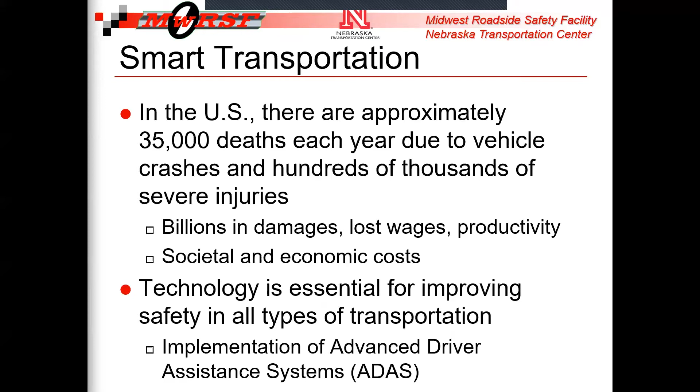Connected and autonomous vehicles, or CAVs, pose an exciting opportunity to reduce the risk of on-road and run-off-road crashes using innovations in technology, mapping, simulation, and hardware-in-the-loop evaluation. Therefore, I am pleased to introduce our speakers to address these safety-critical topics. First, Mr. Jason Marks will discuss the role of instrumentation, sensors, and processing for smart vehicles and transportation. He will describe machine learning techniques for infinite state space road mapping, simulation, and applications to hardware-in-the-loop technologies. Next, Mr. John Barad will discuss mobile and fixed LiDAR technologies and implementation, as well as their role in identifying road users, mapping movements, and developing informational systems for vehicle-to-everything, or V2X, technology.

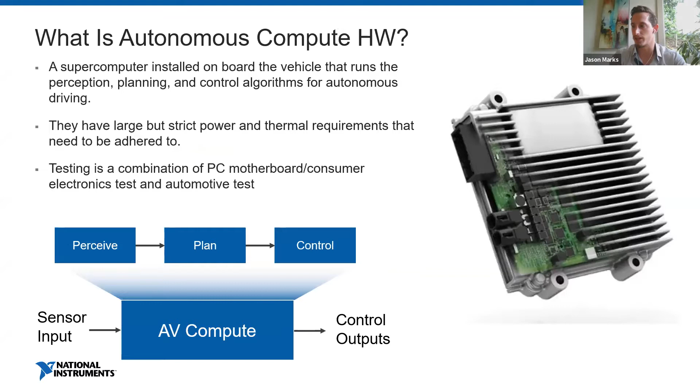Inside of that autonomous compute hardware is actually just your standard robotics paradigm, which really goes through the process of perceiving the world, planning on what to do, and then controlling action of the vehicle. So into the autonomous system is a number of sensors we just described, and output is the control of the vehicle, namely brakes, throttle, and steering.

And if we take a look and open up that box and look at the software stack that is inside of that, you'll see some permutation of this kind of paradigm. So the sensors usually for perception are camera, radar, Lidar, and then a number of other sensors also used for localization of the vehicle in the world.

Inside of the perception stack, or software, is a number of machine learning algorithms that are actually non-heuristic. They use deep learning or other types of AI to determine where the vehicle is, to determine the scene it's looking at, lane markings, object detection, and estimation of where that object's going.

The planning stack then constitutes mostly heuristic algorithms, but also potentially some machine learning algorithms. Particularly when we talk about behavior selection, there is a large number of choices that can be made in any given situation, and then there's an optimization to be made. That can be done either heuristically or non-heuristically.

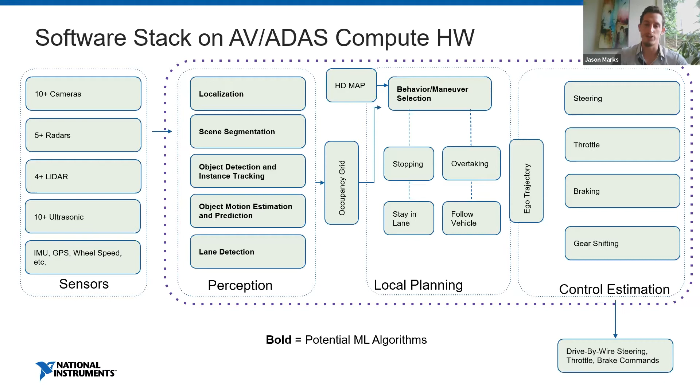As we get into the control system, that's where we see FPGAs deployed for deterministic control. Namely, we pick a trajectory from the planning stage and we then drive it through steering, throttle, braking, or gear shifting. And those usually are actually constituted drive-by-wire commands over the CAN bus.

I did want to talk briefly around the topic of machine learning in perception systems, because this is where the majority of the machine learning occurs. So one thing to note is that there is no set methodology for determining how you perceive the world, how you classify the world. There's tons of different strategies, and everybody's deploying something slightly different or potentially majorly different.

One such example, and this picture is taken from Berkeley Deep Drive, is that if you have your sensor input of Lidar and camera, if you wanted to have an accurate view of the world, you could fuse those together in the beginning. You could overlay your point cloud on top of a camera image and then send that through a convolution and a bunch of deep learning algorithms and determine what that classification could be. That's one way of doing that. We call that early fusion.

However, you could just as well send both the camera data and the Lidar data through two separate convolutions and two separate deep neural networks to classify the world. And then you could compare the outputs. We call that late fusion. Both are equally viable, and they both net you potentially different results. So you have a lot of options for perception systems, which makes this problem even more challenging because there's no set agreement upon the algorithms you would be using for this.

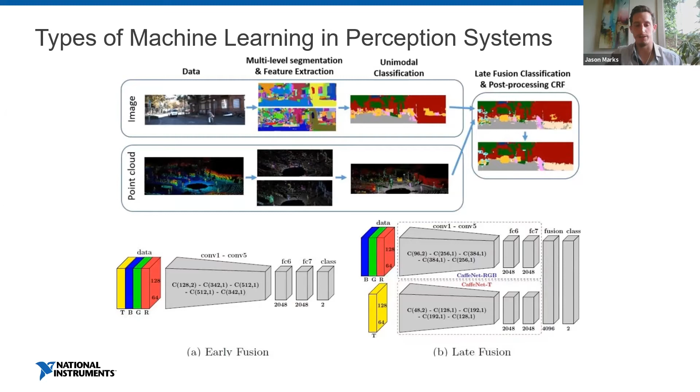So with that said, I hope I kind of made you understand that machine learning is complicated. There's a lot of different permutations of it, but there's lots of ways in which we can actually approach validation of those machine learning systems. So there's two different approaches when we talk about validating machine learning. We talk about white box validation and we talk about black box validation.

White box validation really means, in my deep neural net, are my nodes activating? And that's because you have the vision to look into the box and say, are my nodes activating? Is that an activation occurring? That's one way to validate that.

Black box validation really means I am looking at a black box machine learning algorithm and I only have access to inputs and outputs. How do I validate a system that I only have access to inputs and outputs if I can't look at what's going on inside of here? Most of what we're going to be describing today is actually going to be in that black box category.

So when we talk about testing machine learning, one thing that I'm not sure will surprise you or not, but 99.9% of the validation that occurs for machine learning algorithms in autonomous systems occurs in simulation. And the reason is because of that quote unquote infinite state space that occurs in the autonomous vehicle space. You could have any permutation of road conditions, of weather conditions, of vehicles, of actors moving in various ways. So even if you encounter a scenario like that in real life, you can imagine that there's an infinite number of permutations of that scenario you could have encountered in real life, which is why we simulate it. So we do 99.9% of the testing in simulation.

And then once we're confident in simulation, what we do is we move a subset of that simulation to actually deploying those simulations in a hardware environment. So we deploy the algorithms that we're testing in simulation to a piece of hardware, and we stream that information to that hardware. And we call that hardware-in-the-loop test.

And then we do a combination of on-road testing as well as data recording of those on-road vehicles. I will say that the on-road testing can go either direction. It can happen at the end when you want to validate that everything is safe, that you've already created a great system, or it can happen at the beginning when you just want to aggregate a bunch of data so you can then play that back into a testing scenario. So data recording happens in both stages.

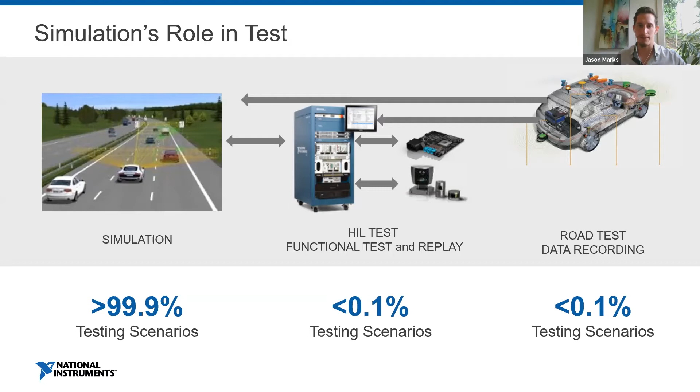So because 99.9% of the testing happens in simulation, let's talk about what are some of the really big challenges of simulation. So what makes simulation hard? Why are we not just all doing the same simulations? Are we all not having the same simulator that we're using? Well, the real answer is I like to kind of group them into three different categories. There may be more, there may be less. I like to talk about it in three main categories.

One is that when you do simulation, you're actually trying to replicate what that particular sensor on the real vehicle would be seeing. And you want to do that in a realistic way that can actually train and test the algorithms that are being deployed. So in order to do that, you have to have a high enough fidelity of the sensor you are modeling that actually is representative of real life. And that is very hard to do.

Just like anything else in the academic world where you're trying to model a physical phenomenon with math and physics, you can get to a pretty good confidence that you're there. And then there's always some different permutations that occur based on environmental conditions, things like that, that diverge from the perfect physics-based implementation. That same thing occurs for sensor models. You need not only a physics-based implementation of that sensor model that represents how that sensor looks, but you need to validate it against an actual sensor so you know that you're getting a correlated sensor capability.

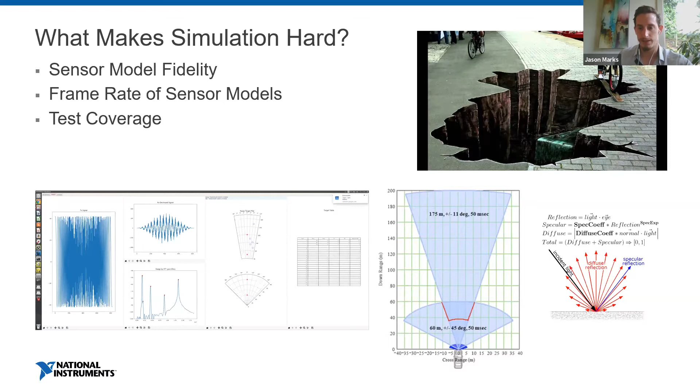So talking real quick about the architecture of simulation. All simulators will look something like this. There may be some variations of it, but it will all look something like this. There will be a simulator that has a world environment in it.

A lot of people are leveraging Unreal Engine 4 for that. Some people do not use gaming engines for that. But that is where the ego vehicle, which is the vehicle under test, is driving in a simulated real world. And there are actors, so other vehicles, pedestrians, cyclists in the world that are navigating around that. Those all have to have some level of intelligence so that they interact with the vehicle appropriately.

From that simulation world, you would attach sensors, those sensor models, to that ego vehicle, and they would be looking out at the world in the appropriate location for that world. And they would be streaming that sensor information that's supposed to be representative of that real sensor to the system under test. So if you're testing just the perception systems, what you would be doing is you'd be streaming a high fidelity version of those sensors to that perception system.

That perception system would do its classification of the world, and it would output to either the planning system or back to your test system: here's what I think I'm seeing in the world.

If you wanted to validate just the perception system, what you would have to do is then compare that output from the perception stack to the semantic information. And because you're using a digital world, a simulated world, you have access to the ground truth associated with that world, and that's how you can validate the perception outputs.

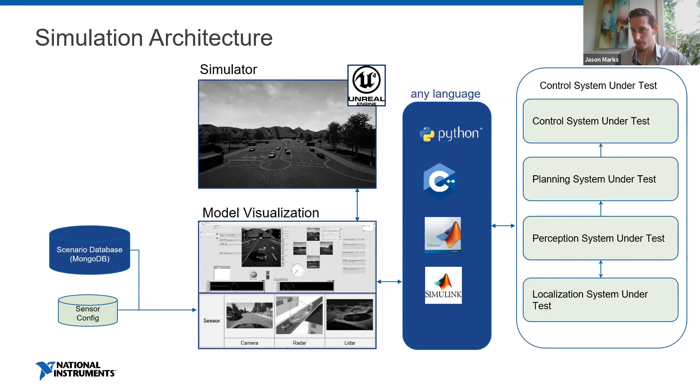So talking specifically about the challenge of sensor model fidelity. Not only do you need a physics-based implementation of radar, LiDAR, camera, ultrasonic, and so on down the line, but you also need the equivalent ground truth of that if you're going to validate the perception system. So if you're implementing radar, you need the correct representation of that millimeter wave signal, but you also need the appropriate object list per point, so you know that you're actually getting that correct.

Same thing with LiDAR. With LiDAR, you're generating a series of points in space, and you need the physics-based implementation of those points in space, which can be fairly challenging to do, and I think John will talk about that a little bit. But light and millimeter wave for radar have all sorts of characteristics that are pertinent to the material properties that you're reflecting off of and things like that, but you need an implementation of that, and then you need the equivalent semantic information.

So for LiDAR in general, we actually use per point semantic information. We categorize each point that the LiDAR is shooting out and what it constitutes as its real life answer: that's a bush, that's a tree, that's the road, that's the lane paint, that is a car. We classify that.

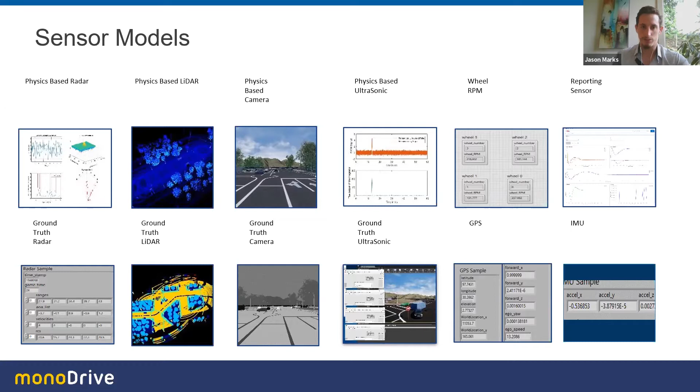So you may be asking, why can't I just use an idealized version of those sensors? Why do I have to have a physics-based implementation of those sensors? That seems computationally expensive. Well, the example I like to use is that if we look at the previous Tesla crash, there's actually, we've had two more since then.

We've had the one that just occurred this week, and then the one that happened in Taiwan a couple weeks ago. If we look at the one that occurred on Highway 101 where they ran into a fire truck—again, I don't work for Tesla, this is just speculation as to what occurred, please don't quote me on that—but what we believe is that part of what happened was the radar that Tesla was using was shooting out at the fire truck, among other things.

There were things like cones in the road that were very small compared to the fire truck. The fire truck was reflecting so much electromagnetic energy because it's so large and metal that it actually washed out the signal to noise ratio, hiding anything that would tell the vehicle it needed to change lanes and avoid the truck.

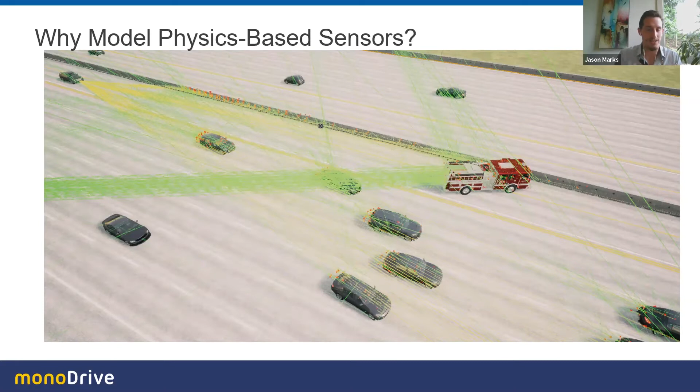So hopefully you now believe we need a real life implementation, a physics-based implementation that's validated for those sensor models. Well, how do we actually go about taking it to the next level, making sure that sensor is representative of a real sensor?

There are a lot of different methodologies, and I'll cover a few here. Some people, beyond just implementing the physics of those sensors, actually use real data from a particular sensor and train it using machine learning to represent that model in its digital environment.

Many people go out with expensive equipment and measure various materials to categorize their reflectivity at various wavelengths or electromagnetic frequencies. Some people get sensor models from the vendor directly, some buy a bunch of sensors and reverse engineer them, and some take chambered measurements of various sensors over the air to ensure they're getting an accurate representation.

So there are all sorts of methodologies, and they all have validity to them. I think some combination of all of them will ultimately prove both the most accurate and the lowest computationally expensive way to do this in real time.

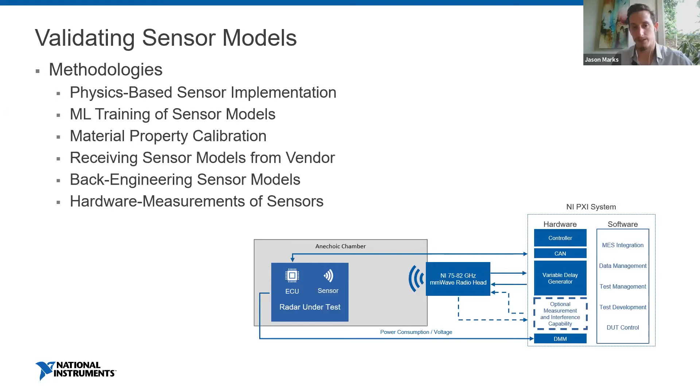Once you've got the sensor models adequately modeled, and your simulator set up so it can run in real time and test the particular pieces of your control system you want to test, now it's your job to address the infinite state space. You can do that a number of ways, and one way almost everybody implements is to parameterize their simulations.

The other piece of this I haven't talked about is what happens when you want to simulate something you encountered in real life. You recorded a real life example and want to play it back, then vary the parameters of that thing you encountered.

One such way to do that is to create a digital twin. There are a couple of companies, one of which we partner with, that are very good at taking real life recorded data and converting it into a digital twin.

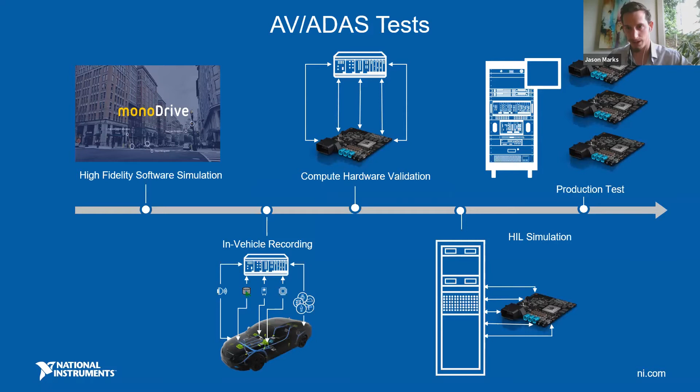You do the software in the loop, the simulation side of things, you validate the hardware, you feel good about the hardware that you've created, then you deploy that software that you've created to that hardware, and you do that hardware in the loop simulation using that same kind of description for software in the loop simulation that we've described earlier, and then you eventually deploy it to a production test environment and ship it into the vehicle.

So when we talk about hardware in the loop, we can talk about a number of things. You have all sorts of options as to where you draw the line for the hardware. You could theoretically emulate targets over the air for images by putting a big screen in front of cameras, or radar by putting an electromagnetic target generator in front of a radar, or LiDAR, which has a bunch of ways people believe you can do that as well.

You could go what we call behind the sensor, where you're injecting still into the sensor, but digitally. But what's most common in a hardware in the loop environment for testing the ECU, the electronic control unit that's deployed the perception systems, is to inject into the network bus directly.

So network buses for sensors vary. For example, for camera, we use something called a SerDes interface, typically right now from Maxim or from TI, so it's GMSL or FPD-Link. For LiDAR, we see a lot of different Ethernet technologies being used. Right now, I think the push in the industry is to move to automotive Ethernet—we call that 100 or 1000 base T1, the two-wire Ethernet protocol. And then for radar, we see a lot of people using CAN or CAN-FD.

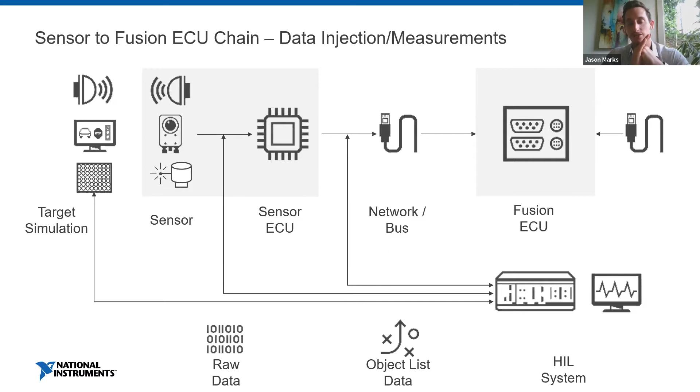But that is the network interface you have to inject those simulated sensors into in order to test the ECU. So what that looks like is you take that same simulated test drive environment that we described, you convert that into the appropriate network interface in a deterministic manner, and then you inject that into the ECU under test. And then you wait for a response from that ECU.

That ECU responds with usually CAN drive-by-wire signals. You send that back into the digital converter box, and that then streams that information back into your virtual test drive environment. And that's how you do a hardware in the loop test.

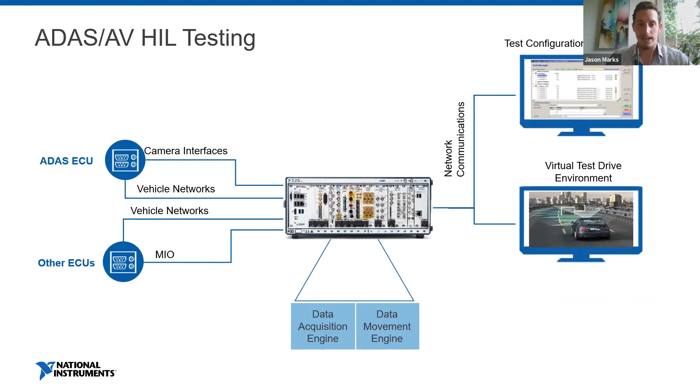Now, these hardware in the loop tests can get massive. If you walk into some OEMs, you may see entire rooms constituting one hardware in the loop test of one ECU. The reason they do that is because there are so many different facets of the ADAS system. There's radar, LiDAR, camera, brakes, steering, driving. So you need some methodology to emulate each one of those things, and that could take up a ton of space in order to get those accurately emulated.

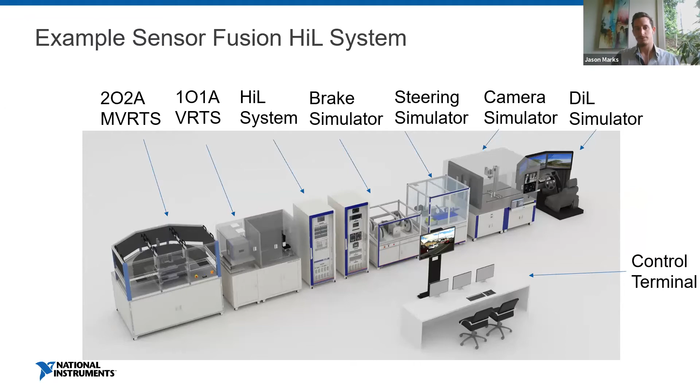So that's the hardware in the loop system. As I mentioned previously, the last piece of this is that there are road tests that occur as well. The road tests occur in two different spaces. They occur either at the beginning, when you don't have an autonomous system active and you just want to record what's going on in the world so you can then play that back or convert it into a simulation. That is what we call in-vehicle recording, and it occurs usually without the autonomous system active. Then there is the final road test, where the autonomous vehicle system is active and you want to make sure it makes the right decisions in various scenarios.

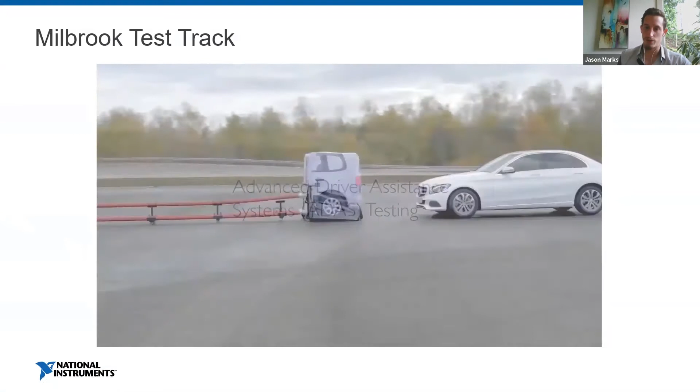So here's an example, and let me make sure that this plays without sound. Good. This is an example from Milbrook, which is a test facility that actually conducts ADAS testing. This is when you've deployed that software to that ECU, so you can see how the vehicle reacts in various situations.

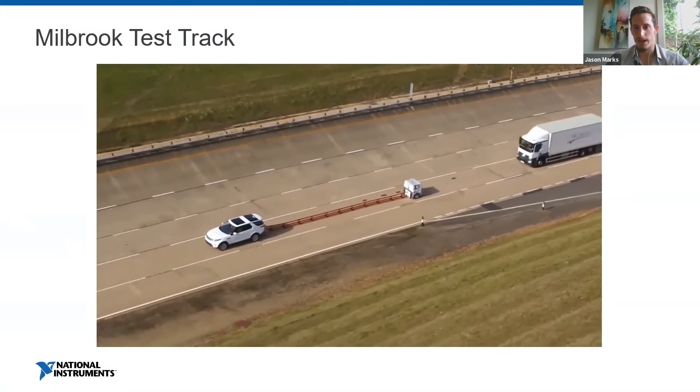You may have seen a video, I think it got virally popular, of a pedestrian crossing the road and a vehicle just smashing into that pedestrian. That's obviously what we don't want to happen. That's why we test it on the road.

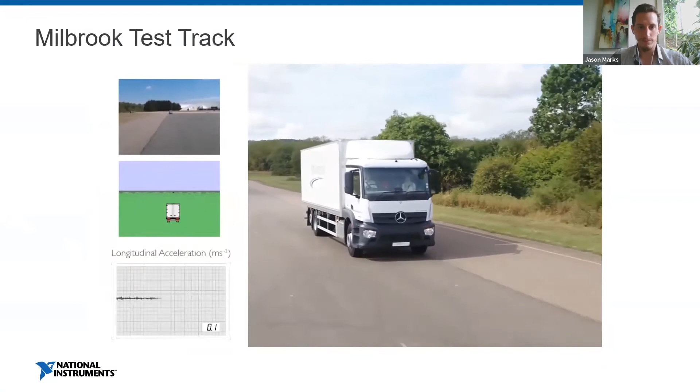So a couple of challenges I'll mention real quick around in-vehicle data logging or in-vehicle recording: particularly for cameras, you have a ton of data. For example, one OEM we work with has 16 cameras, up to 8 megapixel resolution, up to 30 or even 60 frames per second, some with extremely wide field of view fisheye lenses. As you might imagine, that ends up being gigabytes per second of data being transferred, and if you're recording for hours at a time, you could very quickly get to terabytes of data.

And that's where we're talking about how do you store that in the vehicle. You usually have to do that through a series of RAID arrays. And how do you extract that from the vehicle? Every time, you can't just plug in an Ethernet cable and stream that data to a network. You have to have IT infrastructure that can do 100 or 400 gigabits per second of streaming, or pop out those RAID drives and put them elsewhere.

Because every time you take a vehicle down, you're wasting money. Those vehicles need to be operating, recording information as much as possible, so you get maximum uptime. They need to be able to take that data off as quickly as possible. Once that data is off, now you've got to move it around in the cloud or wherever it needs to go. That's a whole other challenge.

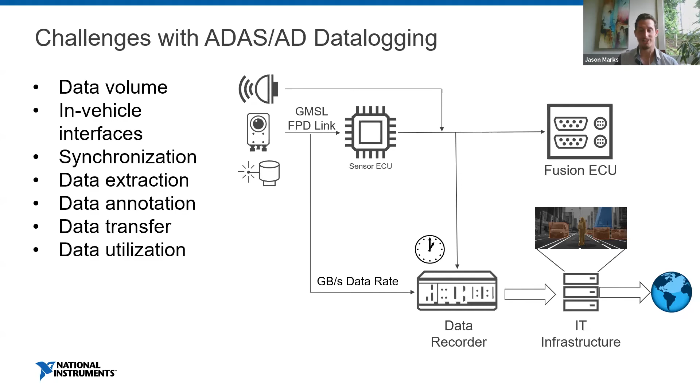There's a lot of people investing in technology to automate that annotation. But you need to be confident in the data you're annotating, because that's going to be treated as the ground truth for what you're doing. If you're not confident, then you're not going to get good ground truth. You're not going to get good training data. You're not going to get good testing data. It's all a big challenge around data.

So wrapping up here, there are a ton of challenges for testing autonomous systems, and there's not good answers to every single one of those challenges. We have theories as to how you can do it, but there's a lot of research that still needs to happen in order to get where we need to be confident in the safety of systems. And a lot of that is because there's no way to look into the algorithms that are being deployed for perception systems.

So if I were to impart some wisdom or advice onto the academics in the room right now, I'd say spend a lot of time and energy trying to solve these really hard problems. Things like the sensor model fidelity, optimizations of those sensor models, and how do we address test coverage. We really need breakthroughs in particular around how we address test coverage in order to solve this problem. And once we get some of those breakthroughs through, it will streamline the ability to get to that autonomous future that we all want to believe is possible.

Hopefully I covered a good amount of information on the strategies that people currently use for ADAS and autonomy to validate them. But please, I'm going to open up the floor now. I think we're at a good time for questions, so let me know what you have.

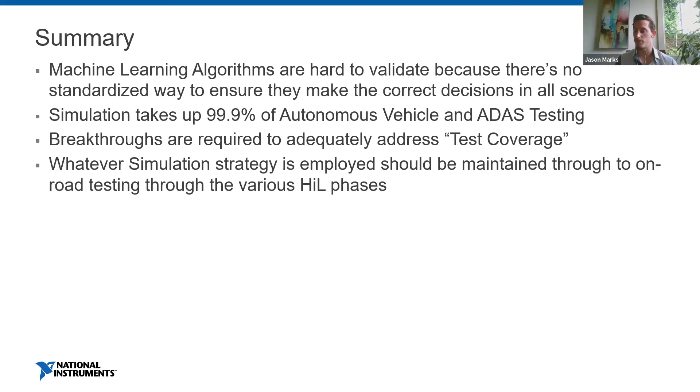First question was asked: are the software or hardware in the loop solutions currently commercially available? Yes, they are currently commercially available. Everyone's kind of in their infancy, so it's a learning phase for a lot of companies. National Instruments does deploy to OEMs and tier ones for ADAS and autonomous hardware in the loop solutions and software in the loop solutions.

Very good. And where would people go to find those commercially available solutions? Usually websites. I'm a great contact if you're curious what NI is doing, but also there's a number of our competitors in the space that are equally viable that you could reach out to. But happy to be the first point of contact for anybody curious about that. I will post at the very end of this meeting my contact information. I can serve as a liaison to direct traffic to you, Jason, or you are also welcome to post your contact information in the chat for anybody who wants to reach out to you.

Second question that was asked is, how are the weather and ambient environmental conditions modeled in your simulation? A number of different ways. If you're using a game engine, usually there are some meshes that let you kind of drag and drop in weather conditions. But there's also a lot of other research going into weather modeling, because really the weather itself is not what's important. What's really important is how that weather affects the sensors. So things like wetness on the lens, that's something that really needs to be modeled accurately, because that's an effect that will really have a dramatic impact on the perception systems.

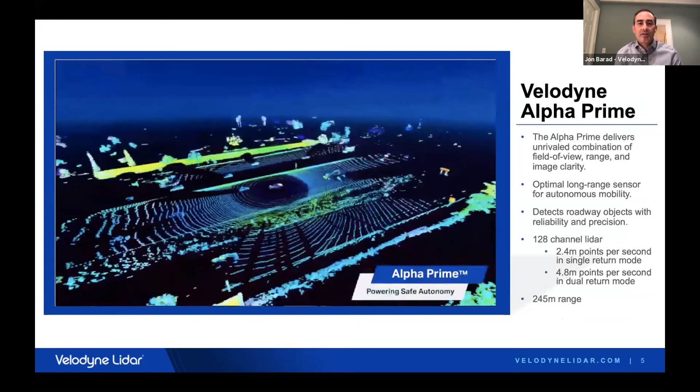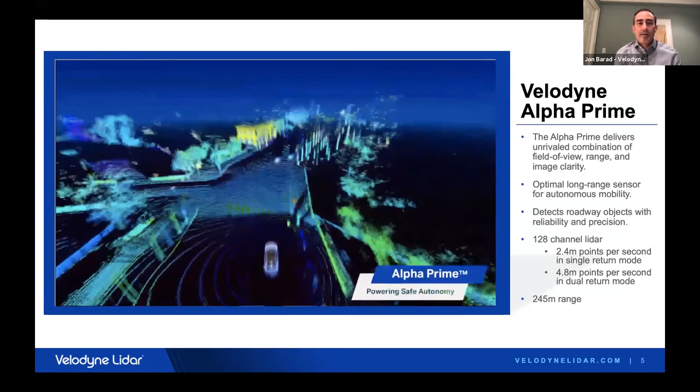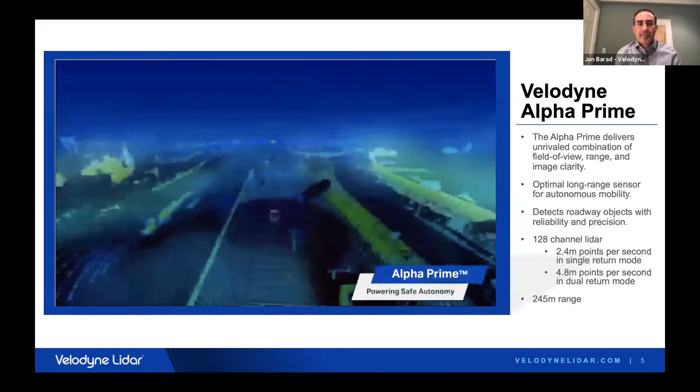Here is an actual video of our Alpha Prime. This is our 128 channel LiDAR. It is the most advanced LiDAR in the world today. It has a 245 meter range. What you're seeing here is the raw point cloud. It's a 3D model that you can move around in, created in real time. The different colors that you're seeing are the different reflective intensities from the lasers. You can make out all the objects. You can make out the lines in the street.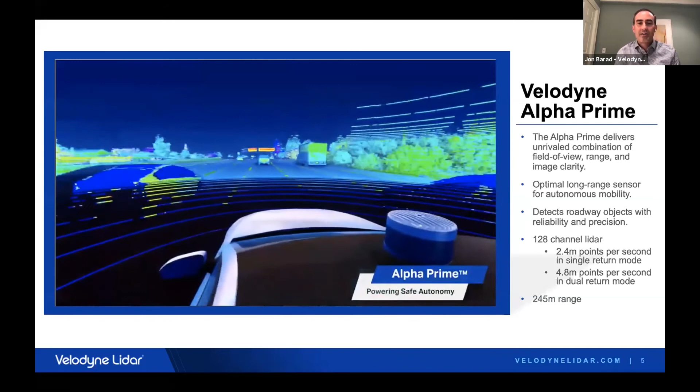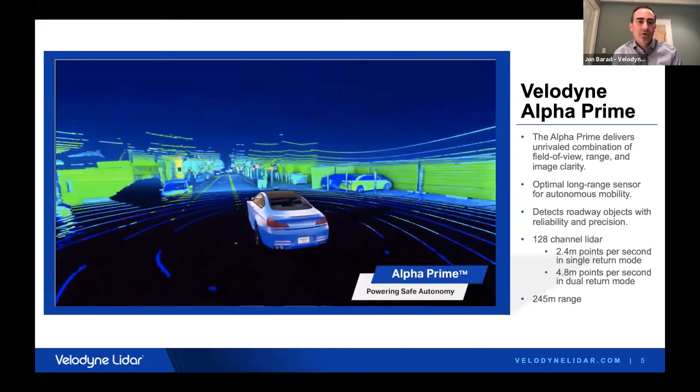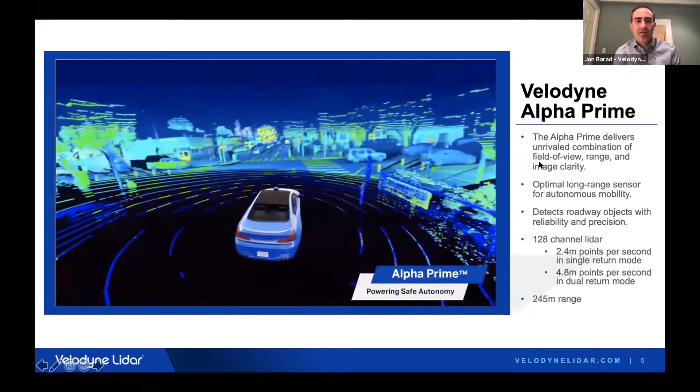At this point in the video, it's really fun. You can actually see the graffiti on the side of that truck there. There's just so much concentrated light that's focused. You can see the street signs. Those tend to be orange or red because they're higher reflective materials. You can even make out people. So this is the sensor that's driving the autonomous vehicle industry, but it's not our only sensor. There are different types of sensors for different types of projects and needs. It all depends on the application, and we've got a wide family of sensors, from our Alpha Prime, which you just saw.

And what that is doing to the industry, which is exciting, is creating this broad, vast ecosystem of exciting applications and industries that are popping up. As LiDAR matures, it becomes more robust, smaller in size, and lower in cost.

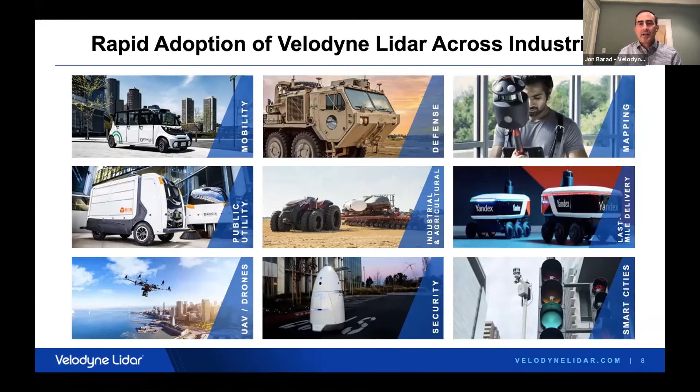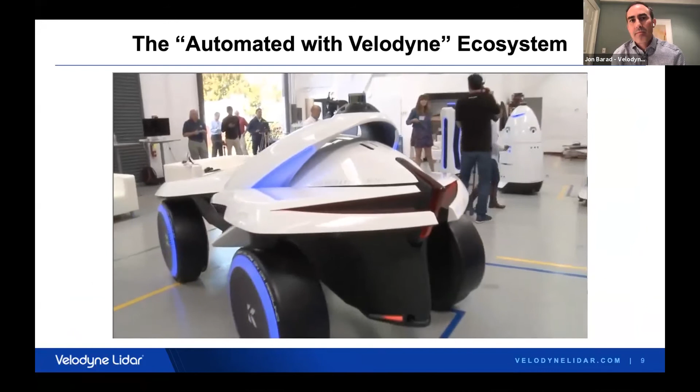We have a wider variety of different sensors, as I mentioned, and really you can create a lot of really exciting applications. And so I wanted to share with you this little video that we just put out. This is the Automated with Velodyne ecosystem. And the Automated with Velodyne program is a partner program that we have developed.

Hopefully that's not too loud for people.

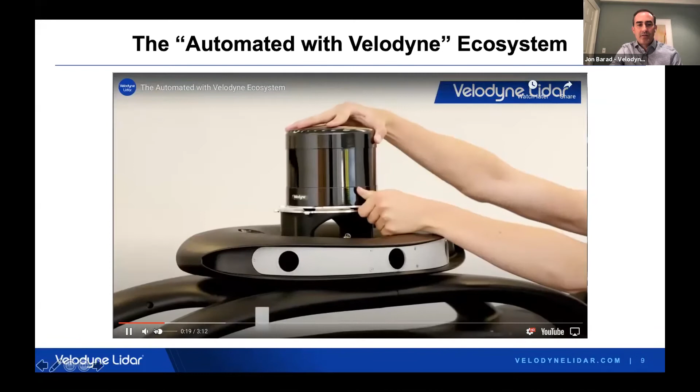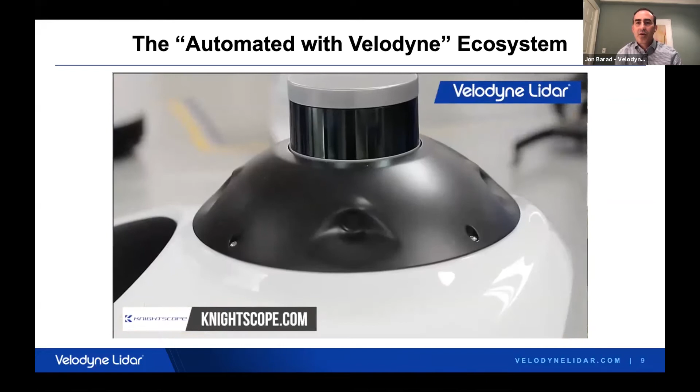But we've developed a way to interact and help promote our partners and help establish a conversation in this industry. There's so many different projects that are utilizing LiDAR today, from automotive applications, security applications, smart city applications, drone applications, that there's a lot of commonalities, a lot of learnings between these companies and these industries. And so we're really helping to drive and bring together different uses, exciting innovations that are enabling new ways of doing business, new efficiencies, better safety. It's exciting.

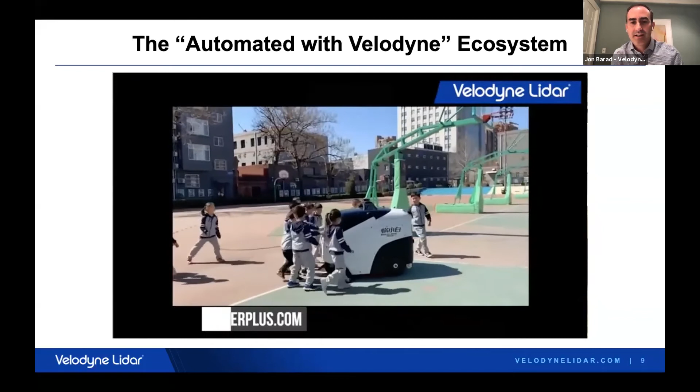Even agriculture, this is a company that is an orchard sprayer. Here is a company out of China that's doing a street sweeping application. It's really exciting.

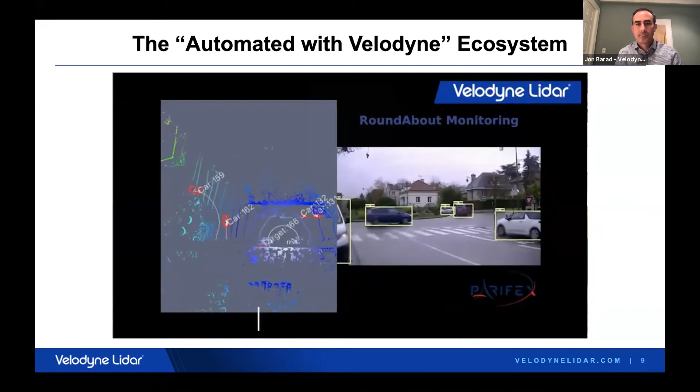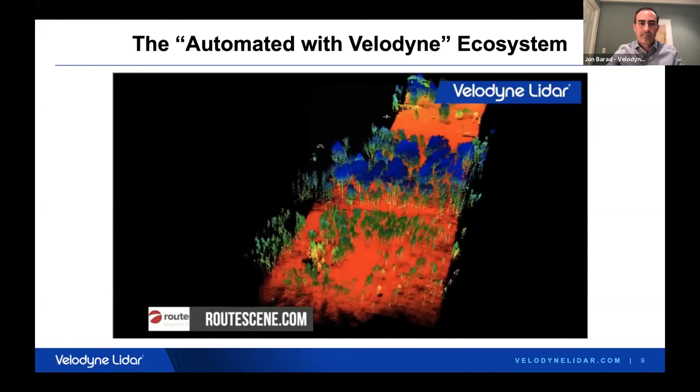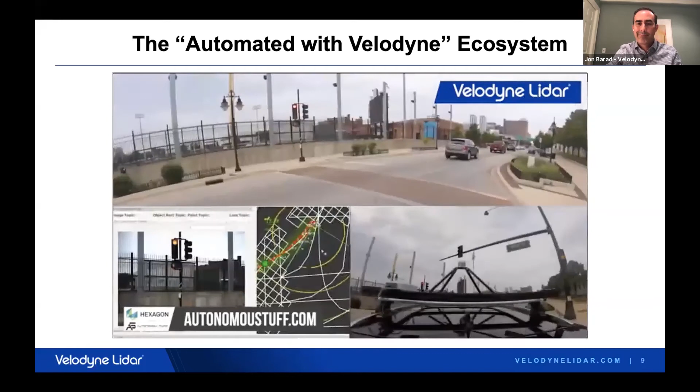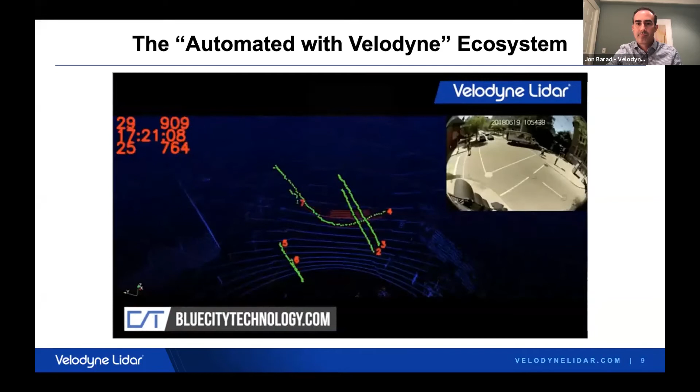Oops. Oh, sorry about that. John, I think we've lost the audio. That's the audio. Sorry about that. Well, yeah, I'll pause there. Can you guys still hear me? Okay. Yes, we can. Okay. It changed my headset. These AirPods don't last very long, and that must have screwed up the video.

But it's exciting to see all those applications, and hopefully it gives you some ideas of some areas where people are innovating and where there's exciting work going on. But it's not always about putting LiDAR on a moving vehicle. As you saw from the video, there's a few in there that I'll talk through now, where we're using LiDAR in a fixed position.

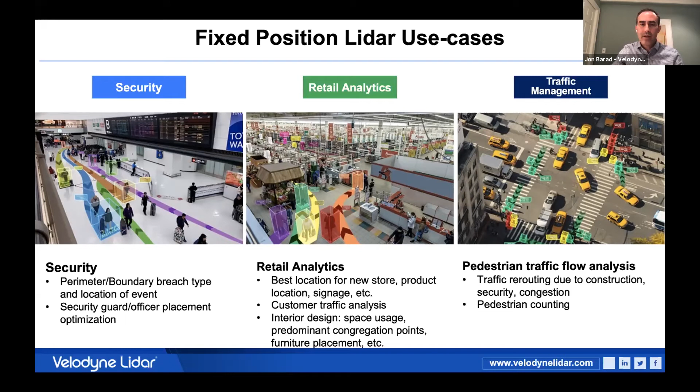It's still capturing and creating a 3D map of the environment, much the same way that it is on an autonomous vehicle, but we're using it instead for perhaps analytical purposes or security purposes, or even just monitoring people flow and traffic flow in an intersection or along a highway. And the attributes of LiDAR really lend itself to these types of initiatives. Here's an example with a company called Seoul Robotics.

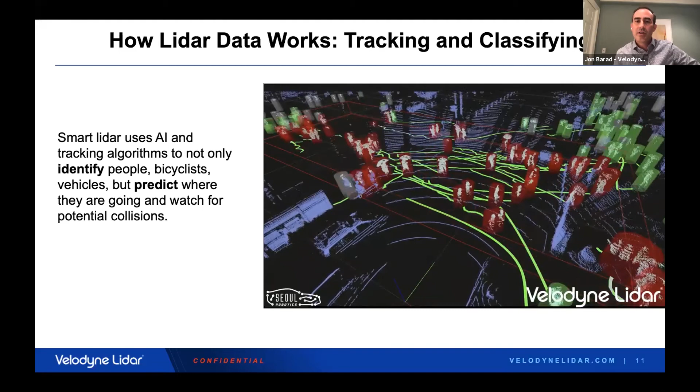We're working with them out of South Korea, where we're using LiDAR to track and monitor this crowded intersection, where we've created a virtual boundary around the intersection, and we're tracking and counting each individual pedestrian that goes through the intersection. They're red if they're in the intersection, they're green if they're outside the intersection. We're counting them, we're tracking their speed, their location, their direction, their trajectory.

All these different attributes really allow us to understand what is going on in that intersection at any given time. And it's not only about efficiency, but it's also about safety, and safety is really what drives us, and what we're trying to help promote in the industry. There's so many pedestrian fatalities. Just here in the U.S. alone, 6,500. It's growing. As people are more distracted behind the wheel, it becomes a problem. And the majority of them are happening at night.

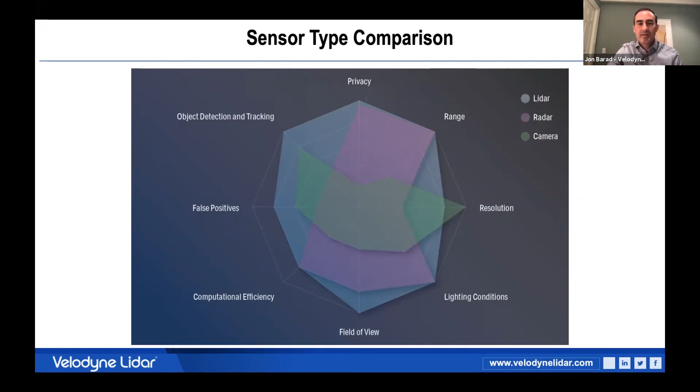Just actually last week, I think it was, there's a bicameral bill that was introduced in Congress called the Facial Recognition and Biometric Technology Moratorium Act of 2020. The idea is that the misuse of facial recognition technology by police departments has gotten a lot of attention for obvious reasons.

Microsoft, IBM, Amazon stopped selling their facial recognition technology, and as we think about a world where we want these analytics, we need this data of intersections, within airports, on roadways, to help improve safety, help improve efficiency. We do have to be mindful that there is a concern with cameras and the use of them for interfering in people's privacy.

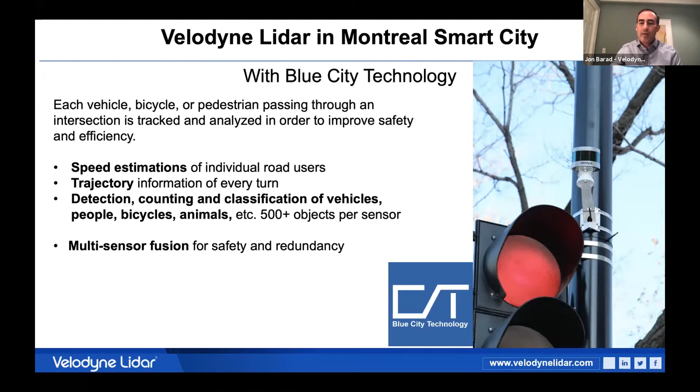Here's an example of a Blue City implementation in Montreal. Just to introduce you to it, very simply, just counting the number of people or vehicles that go through the crosswalk or go through the intersection. You can see this is a lot less resolution than some of the other examples I showed you, because this particular example is using a 16-channel LiDAR. And even with a 16-channel LiDAR, even though you can't see too much with the naked eye, the software is still able to identify, classify the different points that hit the target and be able to determine what sort of object it is.

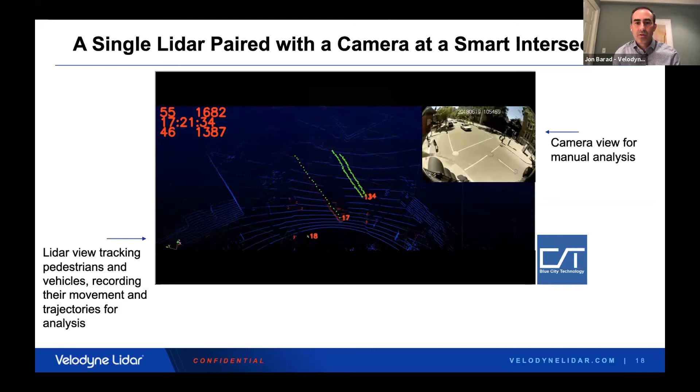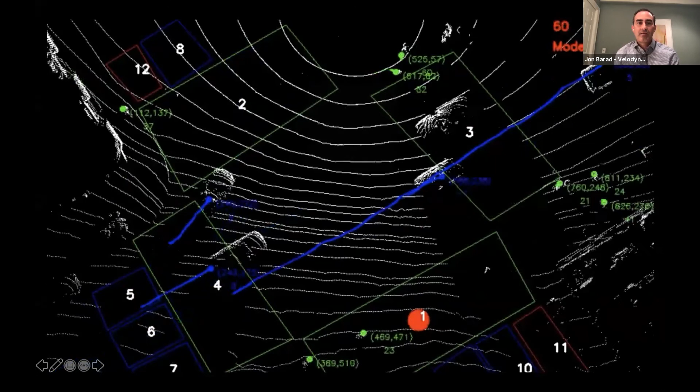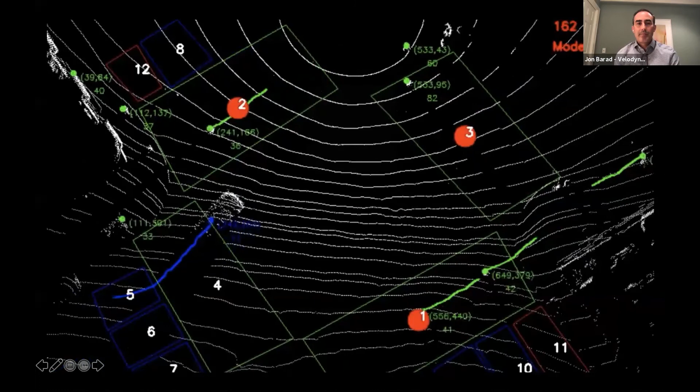When you take it a step further into kind of a multimodal type of implementation where we're classifying different objects and monitoring them, you can see the analytics that come out of this type of scene are just really stunning. We've got the pedestrians in green. If there's a red dot, that means there's a pedestrian in the crosswalk. Blue are vehicles, and you can determine which direction they're going, what speed they're headed, if they're making a turn or not. And this can be used to time traffic lights. It can be used to ensure that the crosswalks are of the appropriate length. It can ensure that if there is an accident, that it's detected.

And when you compare it to other technologies, in the past, people have thought LiDAR is expensive. Well, it's not so much anymore. It's a mature technology. The price has certainly come down, and when you factor in all the other components required to create a system, you still have quite a cost-effective system. So this is a slide from Blue City Technology again, where their entire LiDAR-based system is less than $15,000 per implementation for an intersection, where you really only need one sensor, versus an inductive loop system. You have to dig up the street. You've got to put one in each lane. It's quite a high installation and maintenance cost.

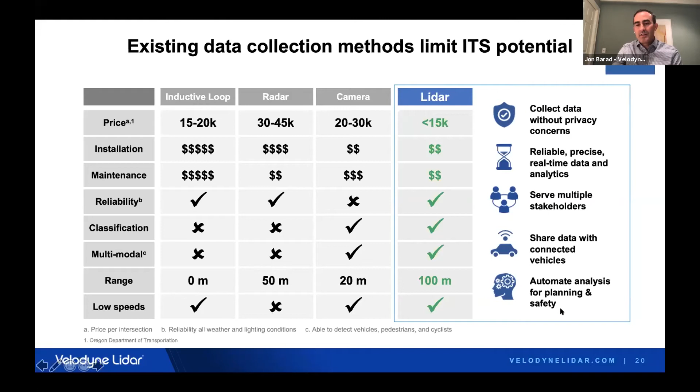Radar, you need multiple radars. You don't necessarily get the resolution needed to really do a lot of the classification that you would want, or the multimodal application. And cameras, certainly, on a sensor to sensor cost comparison, cameras can be cheaper, but with multiple cameras, more compute hardware is typically required in order to really achieve what you want. So we're kind of at the outset where a business case is certainly feasible to be made to begin to leverage LiDAR.

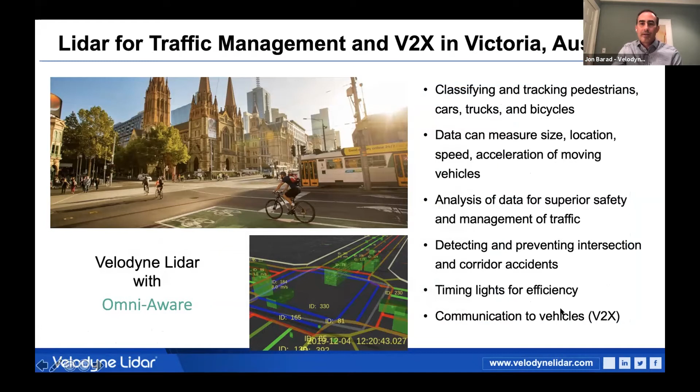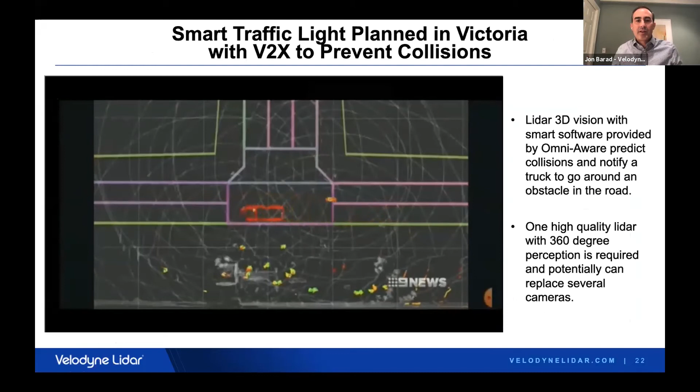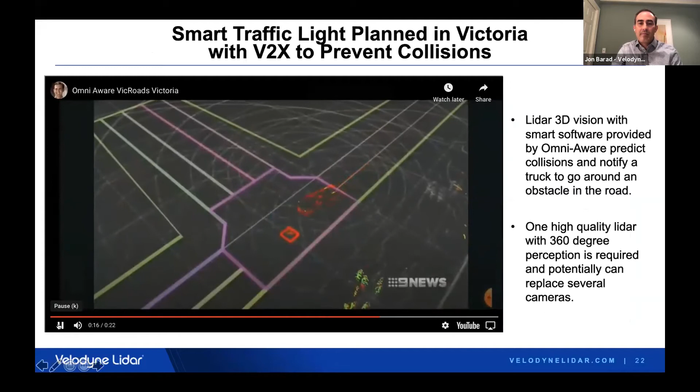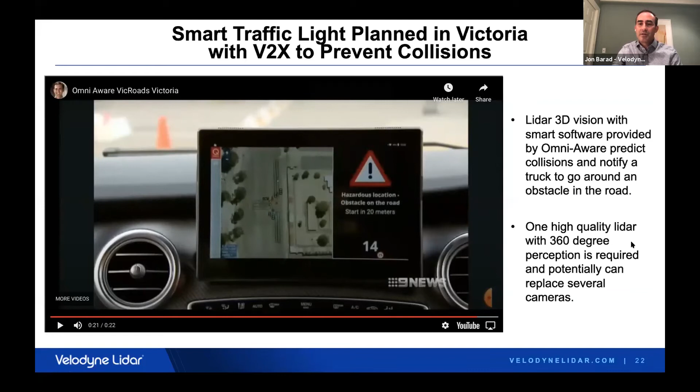And this is happening all over the world. In Australia, we're working with a company called Omni-Aware. This is an example of some tests we've done with the government of Victoria in Australia, where, as you can see, LiDAR detects something in the road. It's monitoring an intersection, something small that maybe people in a vehicle haven't been able to see, and you can see that information can be sent to the vehicle for a V2X application, where LiDAR can continuously monitor an intersection that may be miles away from a particular vehicle that doesn't have the line of sight to be able to see it, and help reroute traffic to improve that.

In France, we're working with a company called Parifex, which mostly does speed control systems. They've deployed hundreds of speed control systems. If you've ever driven in Europe, you see these on the side of the highways, and they're getting more sophisticated.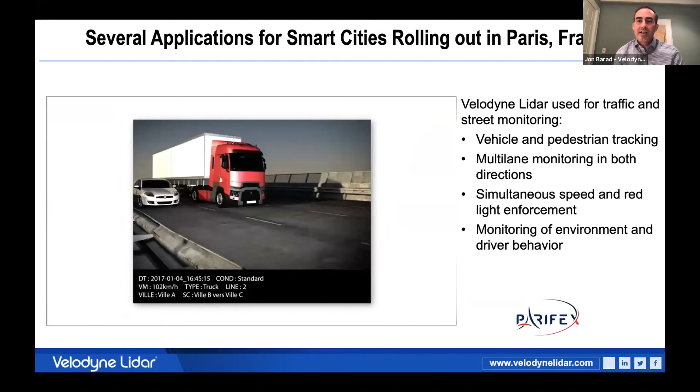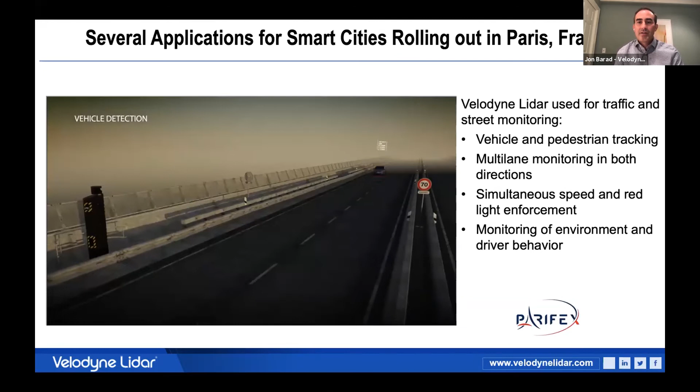It's not just a camera and a radar anymore, but LiDAR is being implemented now, because LiDAR is able to provide more resolution so that you can distinguish what lane the car is in that is speeding, or where the infraction is coming from. It can be from both directions, so you can actually measure multiple cars at multiple times.

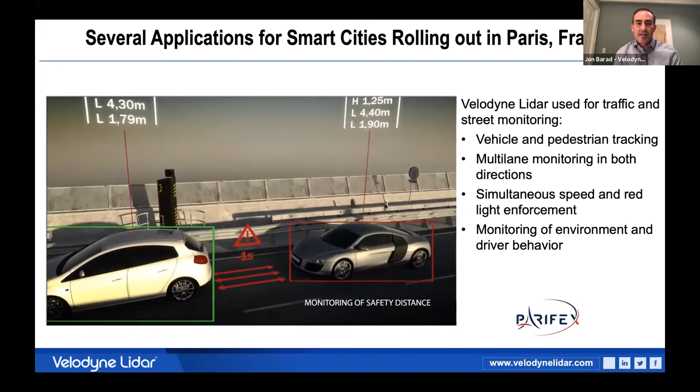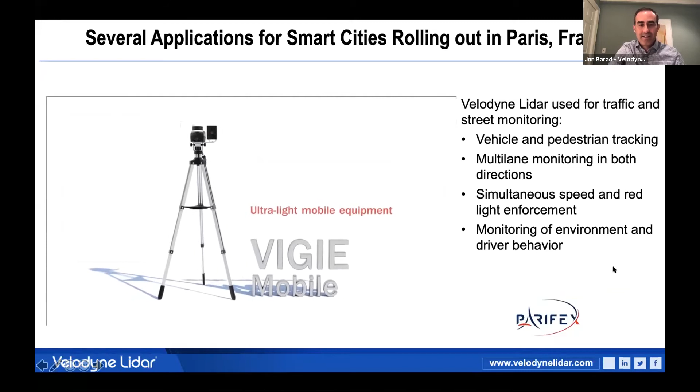You can even, in one instance, identify cars that are too close together, if there is poor driving behavior, and be able to detect that. So LiDAR gives more resolution than radar has in the past, and I guess it's good news for speed traps, bad news for those that have fast cars.

At the University of Nevada in Reno, we're working with those guys there. They've developed, and they're one of the leaders in the space here, a smart corridor, where they've deployed LiDAR at, I think, 9 different intersections now.

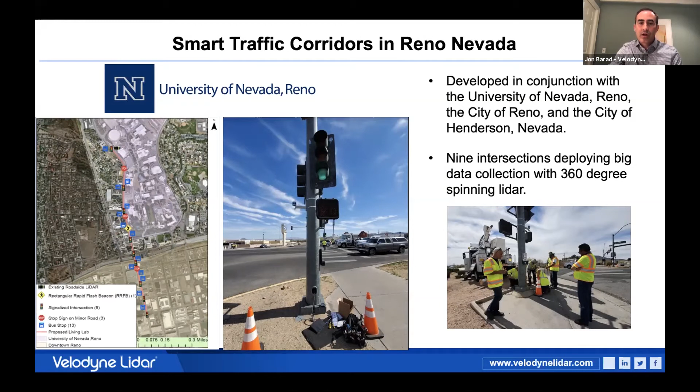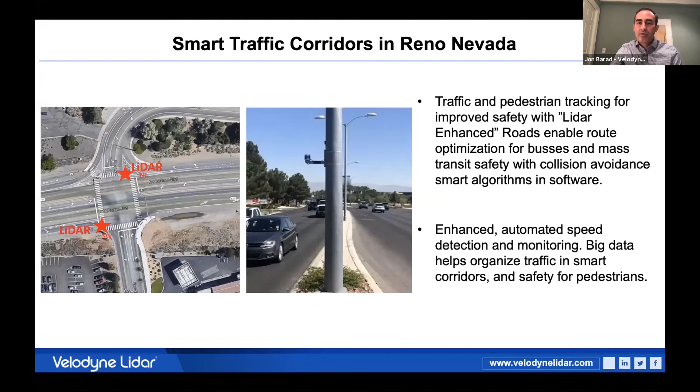In Reno, near the university, they are monitoring all the same types of use cases: monitoring traffic, monitoring pedestrian flow, trying to study the traffic, make sure they can improve throughput, and assess how at certain times of the day there are spikes, and why that is, because you can get really good resolution. In addition, they're using LiDAR to detect wildlife going over crossings.

That's a big budget item for the U.S. government, certainly to build these expensive overpasses for wildlife, and it's not always necessarily clear how well they get used.

Radar is useful, but doesn't have the resolution to really count how the animals are crossing, or what animals are crossing, so LiDAR can be effective here, not only for counting the crossings, but also to detect if there are animals on the road, to create early warning signs for vehicles.

From a different infrastructure standpoint, not necessarily vehicle infrastructure, but at airports - obviously that is another very crowded, trafficked environment.

LiDAR is being used in a variety of ways to monitor people as they flow through an airport, monitor security lines to ensure that they're not too crowded, or in this day and age, even monitoring for social distancing effectively, so there are better controls for people to have overflow areas or abilities to move around.

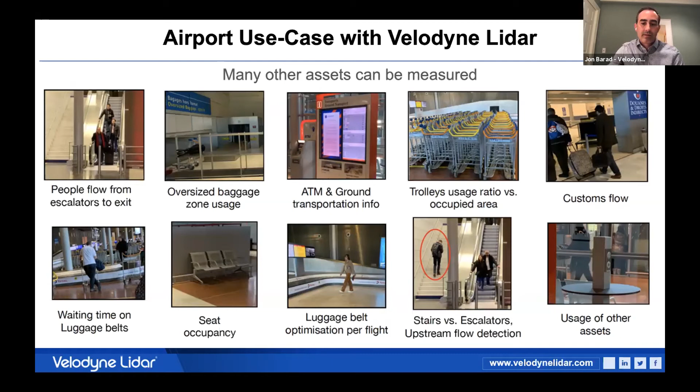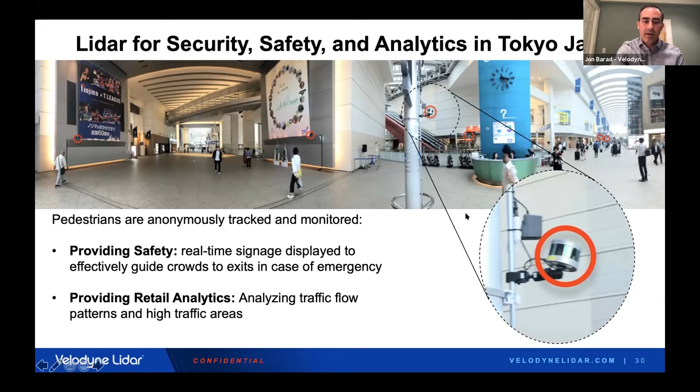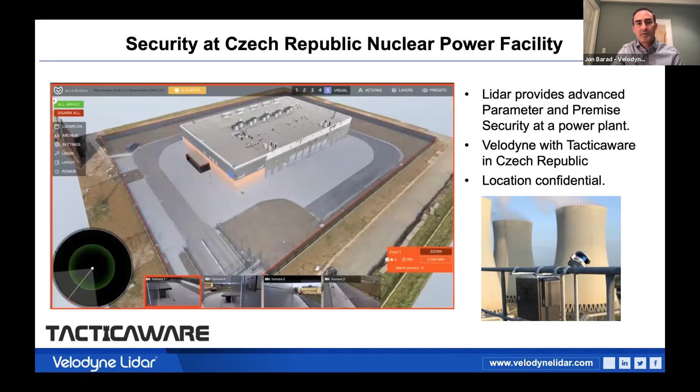This is a company called TacticAware. This is actually a simulated environment where they take video imaging and LiDAR imaging and combine it to create a 3D world where people can be tracked in real time. The LiDAR actually controls the camera and the direction of the camera, so that you can get a visual on people if that's necessary.